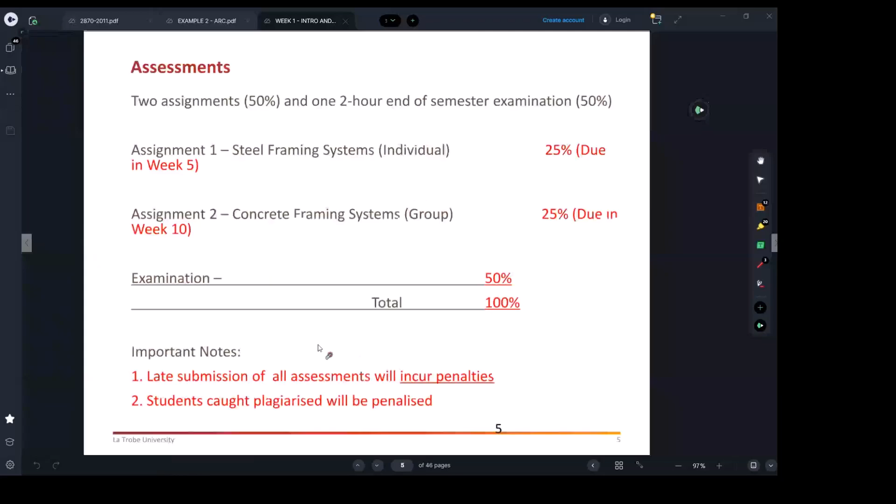You can see our lecture notes can be really lengthy, right? Some of them have large pictures, but the way I'm delivering them to you, it's kind of industrial. I'll talk with you as we want to build a project together, not just reading what I see here. You're gonna see, and I put them there. Someone will ask why we have all those materials.

They will help you give me the right answer for assessment 1 and assessment 2. That's the answer. All the information is given to you in the lecture notes. They're gonna be the key elements you need to know to get ready to first answer your assignment 1 and 2 with your teammates. Number 2, to get ready for the final exam. Final exam will come only from the lecture notes as well as the practiced assignments and workshop questions.

So I strongly suggest you attend, or ask, or watch if you couldn't, the videos, because things I found in the past were really very useful, and students get well engaged with it. So 2 hours, which we started the first one today. As I said, next week we may have our lecture from early in the morning. Workshops.

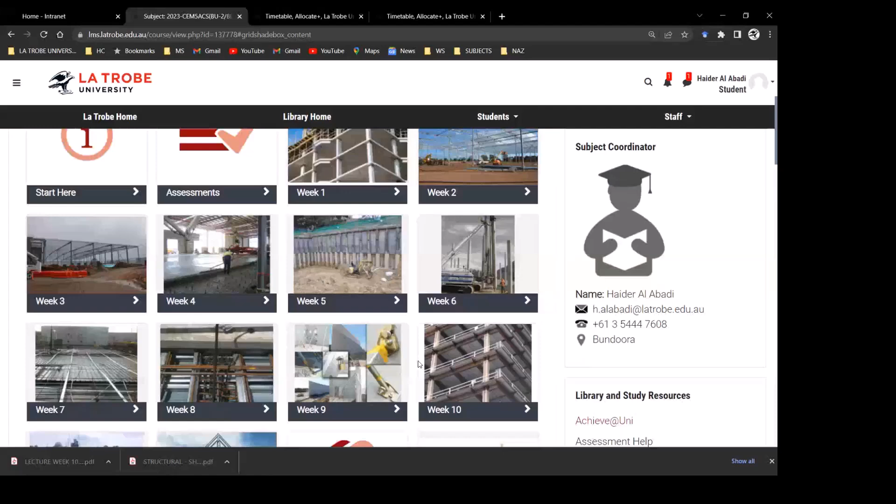I'll confirm this as I go over the weeks. Let me give you an example - when I give you assignment 1, I will simply ask you, for example, where I'm going to teach you all the details, how we connect the portal frame elements together.

I will teach you, let me zoom in - so I will teach you all about the challenges and details to build a portal frame steel structure like this. There is a hinge, there is a column, there is a rafter, there is purlins, there's girts. I know these are the terminologies we're going to use and use and use.

So in assignment 1, I will ask the students to detail or annotate for me the connection between this and that. Some students just Google search something from somewhere and put it on their sheet and tell me this is the answer - it's absolutely wrong, because maybe they did not even attend my lectures or the workshops, so they don't know what we're talking about.

In my assignment, I've given you all the real pictures, and you're supposed to be searching for the correct picture, then annotate things and detail it in the right way. It needs to be related to the project. You don't need to Google search and just find for me a portal frame connection. They end up doing that, and I can show you such examples, which is really funny.

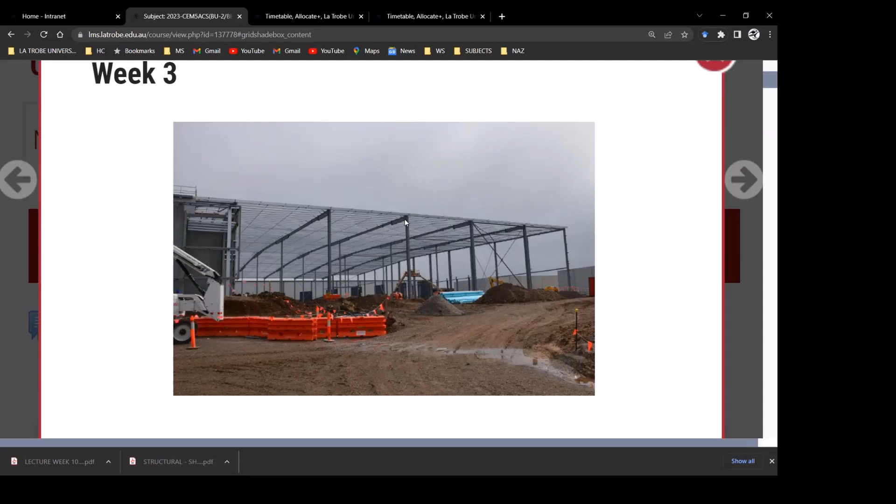But this is just an example. The drawings I'm going to give you are about 4 to 5 projects. You're going to be using a lot of knowledge, details, and construction skills. You will be asked within those projects, full stop.

I will not go find another challenge and ask you about it. The ones we practiced and talked about in the lecture and workshops, they will be the ones that come to you in the final exam. There may be some details I kept on those drawings, like connection details we don't talk about. I will not bring those, I know that.

Everything is recorded, and I know what I taught you and what I didn't teach you. So if you're following with me, you will. I see students really get on top of the subject very well.

Unfortunately, very few people fail the subject because they simply just don't know what we're doing, and they're busy. They're just not really following the curriculum, which was a weakness.

We try to support the students. I know they may be engaged with something else. We try to support students as much as possible, but you can't. Some students really don't answer anything or talk about what we're discussing. Sometimes in the assignments, they go and get things from the internet.

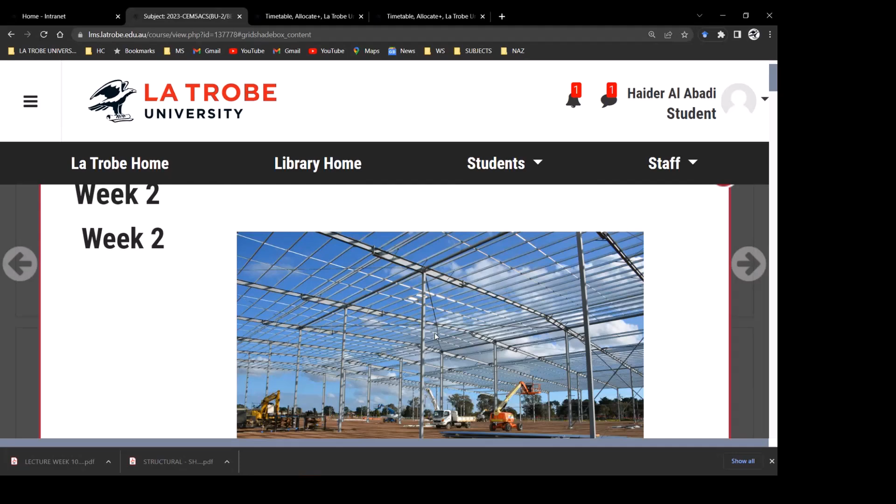This one is a bracing element. See this X here? It's a bracing element, right? So I may ask you to detail the connection between the braces. So that's really the construction techniques, and students typically do very well.

So no open book. Any software need to be learned to do these assignments? Not really, no, no. You don't need software to learn this subject, but you need to know how to type things and get things done.

Any other questions? Recommended a book for this subject.

You're going to be provided with all the materials you need. The books that I may have, I will list for you. Actually, there is no book because the books may not be local.

What I'm interested in for this subject is exposing you to local materials, as well as a lot of industrial materials. For example,

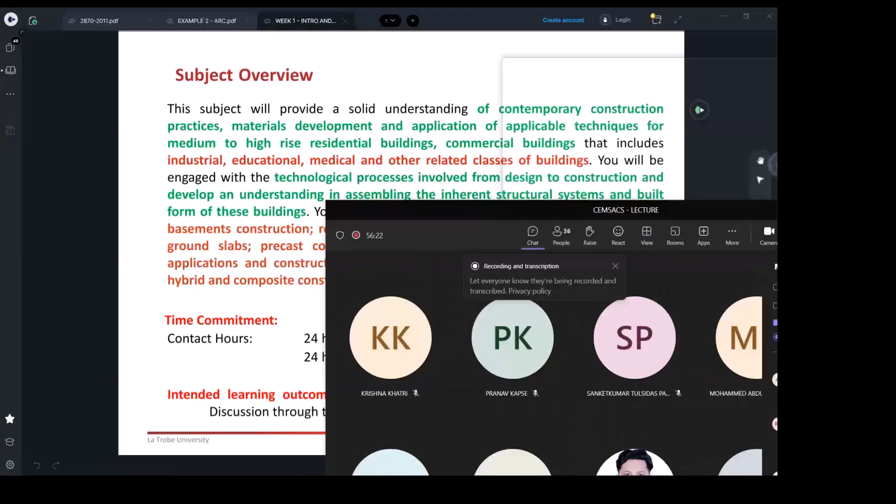I will show you. If you bring up Microsoft Teams, actually not this one, there is another page in Microsoft Teams. Let me open it. I think Bendigo students already received something about this. What I'm trying to say here in Teams...

This was actually your icon, Advanced Construction System. That's where you are now in this lecture. This icon here is for the online workshop for Bendigo students. Only Bendigo students are able to access this. The recording will be saved and they can access it whenever they want. However, Melbourne students, when they are expected to come to campus, won't have access to this.

Workshops are really dynamic and active because during the workshops I will be spending 50% of the time giving you support to work on your assignment. Basically, I will be solving the questions for you. Over the workshops I will start solving your assignment one. This coming workshop I will introduce you to your first activity and assignment, and start solving the questions. I like showing you how to do it. So that's where I'm expecting you guys, in a group, to come up with high quality submissions.

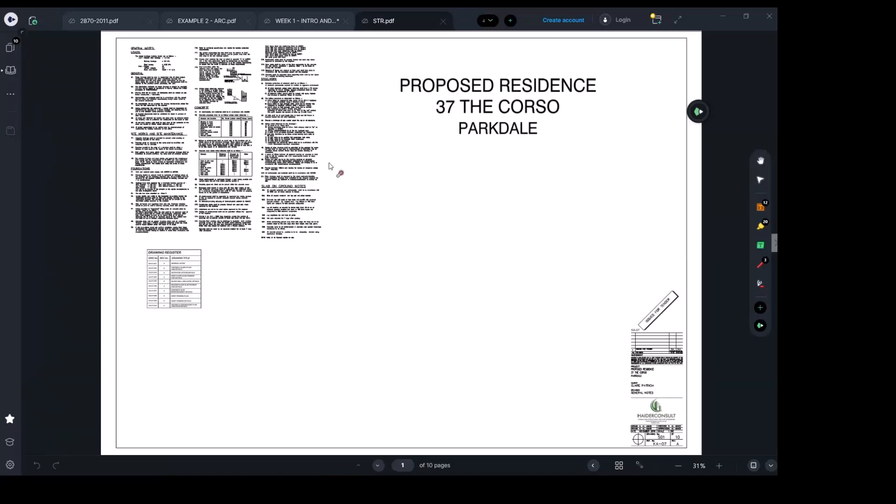I'm not sure if this is the one, but let me try. Because I don't want to show you your drawings. So this is just, I was showing the students structural documents like this.

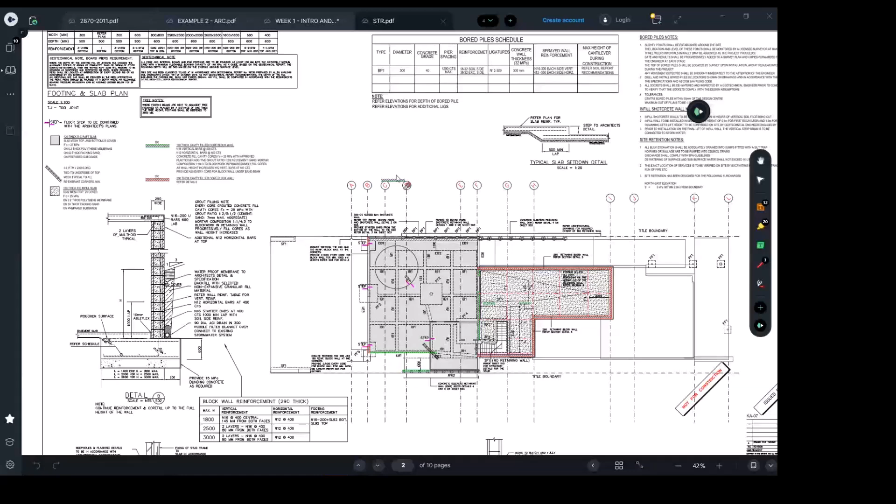I was telling the students that architectural drawings usually can be understood by different people from the community, because usually the architect is doing them for general, public use. Everyone, a lawyer or whoever in the industry who wants to build a house, should talk with the architects to know how to do them. But engineering drawings, no, you've got only professional people who know how to use them.

Some clients, they may ask. So what I'm saying is I'm gonna be exposing you to, like this is a residential slab we're talking about, but your projects are a bit more complicated than this. You're gonna be exposed to many engineering drawings or even architectural drawings.

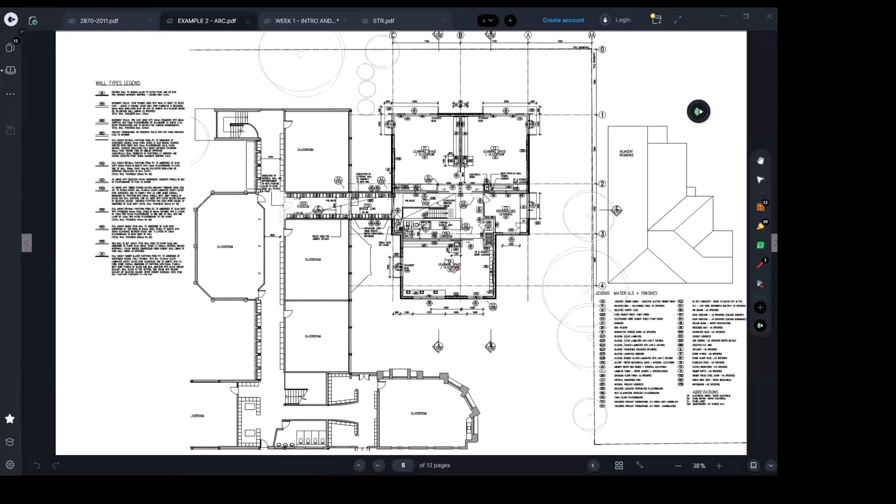These are architectural drawings for one of the main projects you're gonna be doing. What I'm saying is normal people can understand architectural drawings with some thought, but structural drawings... I closed it and I just need time to find it. I don't know where it is for this project.

Which subject was I talking about? Yeah, this one. Is there anyone among you who was practicing as an engineer or worked on it? Are you all engineering students or?

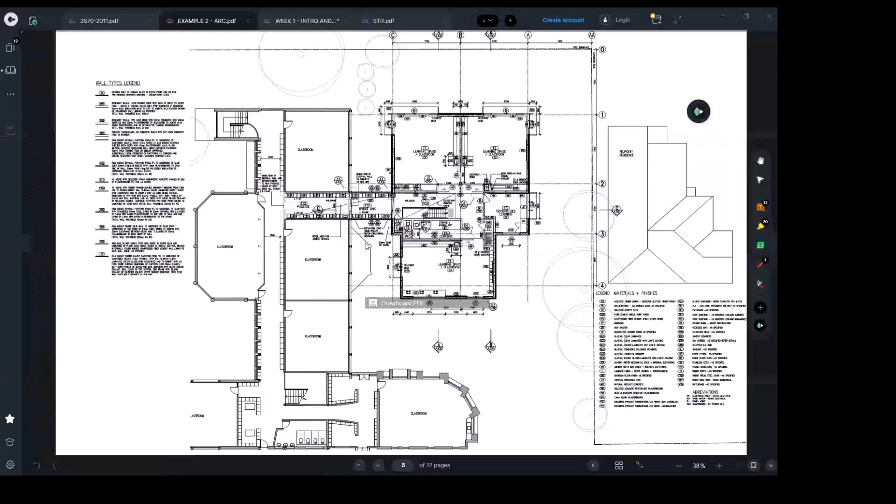Here we go. So as I said, these are the architectural drawings for a school development, which is going to be one of your projects. You're going to be practicing on and understanding buildability and feasibility challenges. As I said, the architectural drawings are mostly to do with the look, etc. But structural drawings for the same project look something like this.

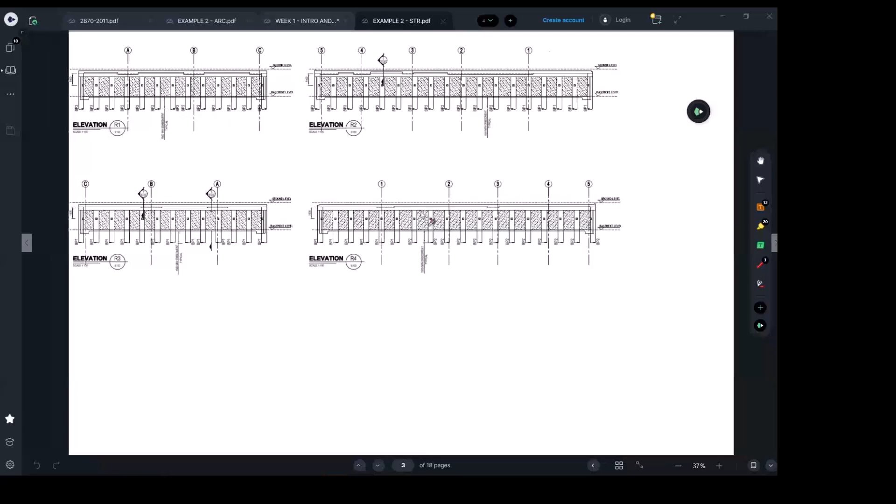So can someone tell me what this is about? What does this show you here? Don't tell me elevation. I know elevation is written here, but elevation for what? These are the columns from the side. Thank you for trying. Any other answers?

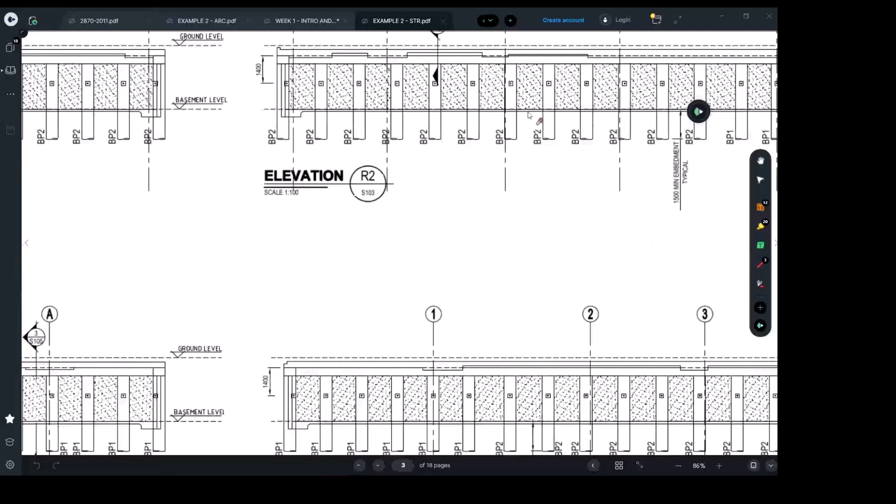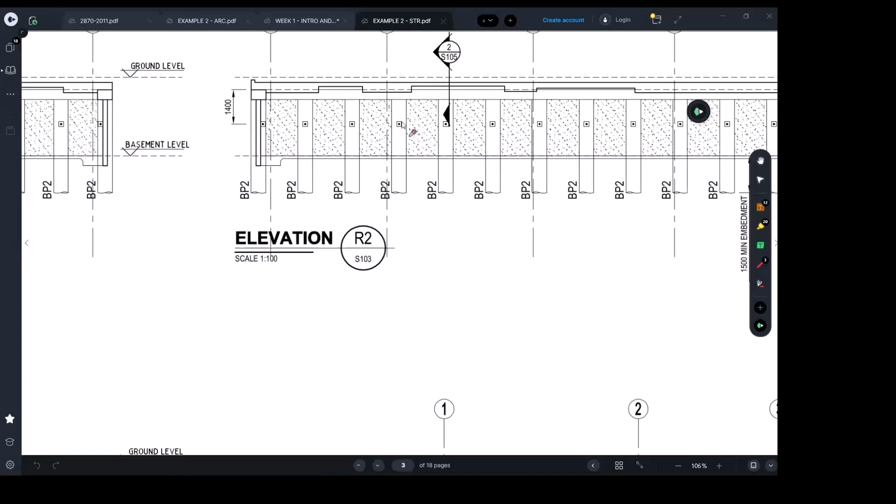Thank you for trying. Slabs. Any other answers? There's the drawing of a truss, roof truss. Thank you for trying. Any other answers? They are piling. Perfect, well done. It is, they are piles. Yeah, they are piles, that's it. They're telling us how piles are built, and they are anchored piles.

So that's what I'm saying, I was stopping at this slide. Drawings are the key elements to work with in order to do your job and get paid. You are in the construction industry, whether you're going to be a manager or a big boss or whoever, you have to debate with your client or the engineer who did it about the drawings. That's your language, so you need to understand it. And this subject will let you have very good experience in doing that.

So please, these are hands-on assignments. Hopefully this time I won't see a literature review about concrete. You'll be giving me, yeah, it's not a report, it's engineering documents I want you to work with. Yeah, there are piles. A set of images, like assignment 1, I will give you a lot of pictures taken for a project and ask you to annotate and detail the names.

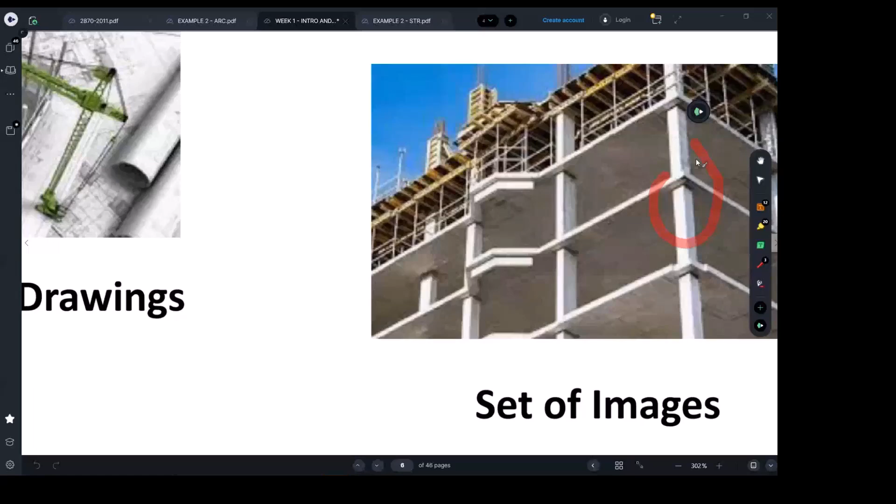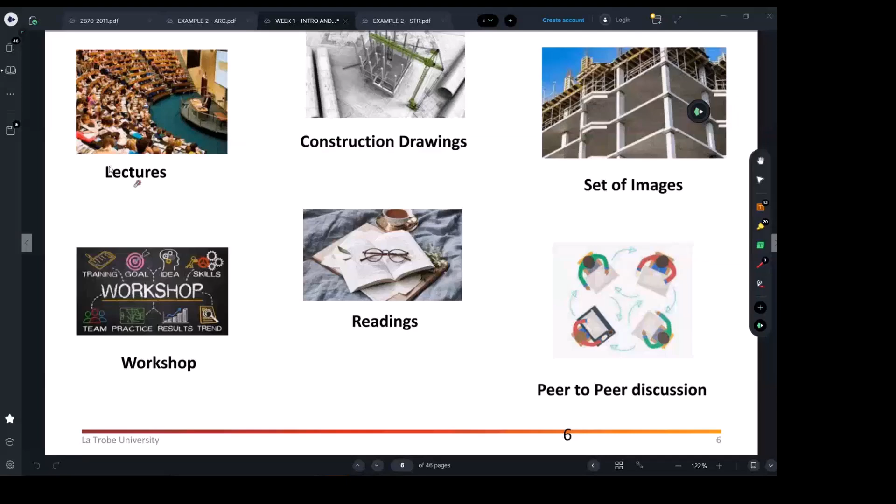As a practicing construction engineer, you need to know the terminologies, the names of the connections. Sometimes I'll ask you what type of actions we have there, some engineering thoughts you need to put there. So we're going to be working on images, drawings, lectures that I'm delivering with you every week. You have to understand them, the lecture notes, workshops. They are the environments which will facilitate the delivery of these ones.

And the good thing which I found really gets students super engaged is that I will help you solve those assignments, okay.

Reading materials, as I said, to some limit and as per my instructions. There are reading materials that I'm giving you in a particular week, which I just want you to know about their existence. But don't expect me to ask you about them in the final exam. No, no, no. If I have used one of those reading materials in solving questions and figuring out a construction process, then yes, expect it to come in the final exam.

If this is clear, I think people should not ask me this again, because people do ask how they can get prepared for the final exam. It's 50%, and I'm just telling you this now.

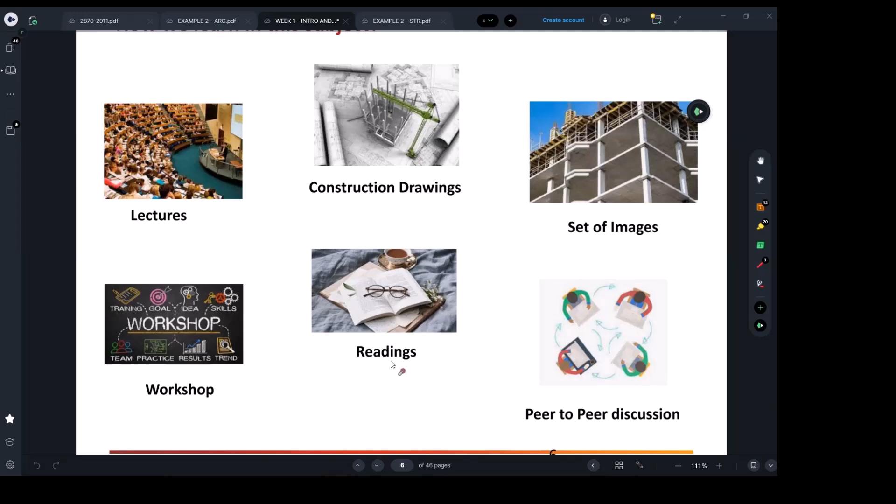And this is your team, maybe 4 or 5 people, will figure this out. Yeah, you need to have that peer discussion.

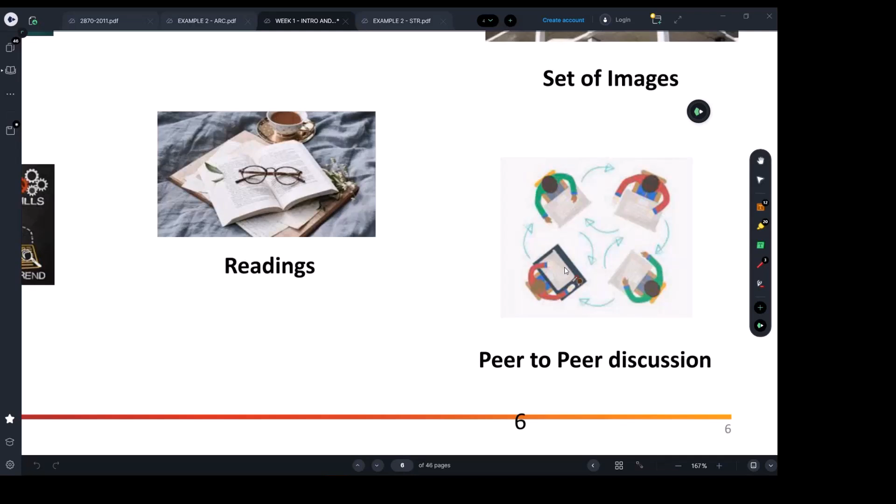If you're going to submit your work, I will be asking students to put at the top who did which part. Maybe give me a summary page or table saying Mr. X did these sections, Miss Y did these sections. I need to know those names to make sure there was teamwork. If I find one of the qualities is really poor, that means the others won't be impacted.

Okay, any questions?

Okay, let me give you a 5 minute break. You need 5 or 10 minutes break? Yeah, no preference. So let's meet again at 10 past 5. Just have a quick break. Yeah, you want more? Okay, let's meet quarter past 5, then I will continue over the slides.

I know I've slowly gone through the first sheets because I just want you to understand how we're going to be working together, because if you misunderstood the main learning techniques, that's the challenge. All right, so let's meet at 5:15 and then continue the slides and take it from there. See you then.

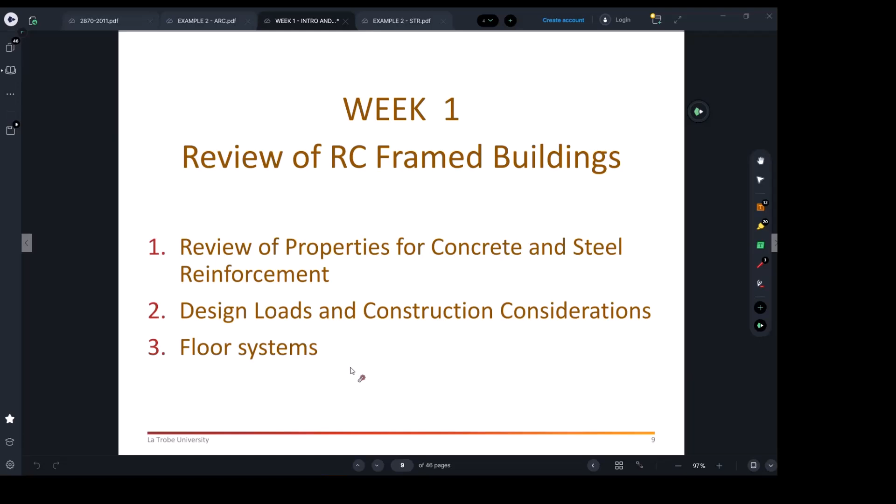I won't go through design, just talk about the construction side. So there are a number of properties for concrete and steel which a construction engineer needs to know about when supervising the construction of such elements. For example, here we're starting with...

As I said before and saying now, we assume students have enough background about concrete mix design and these kinds of details. This is just a reminder.

Now, RC refers to reinforced concrete. I keep saying RC, meaning reinforced concrete elements. They have two types of properties: fresh concrete or wet concrete, which is the one we just poured, and hardened concrete. In the morning, I was teaching design students how we design concrete, and I was telling them the hardened properties are the most important ones for them, because typically engineers design the status of hard concrete, as you studied at undergraduate level.

However, for construction engineers, fresh concrete is also important, maybe even more important than hardened, because if they build it correctly, hardened concrete isn't their problem anymore - it's whatever the structural engineer did. But fresh concrete is what you're actually getting supplied with and what's going to happen on site. So you need to make sure it's as per the recommendations required from standards or drawings. So wet or fresh concrete properties are things like workability, slump test, bleeding, shrinkage, plastic shrinkage, and compaction and curing.

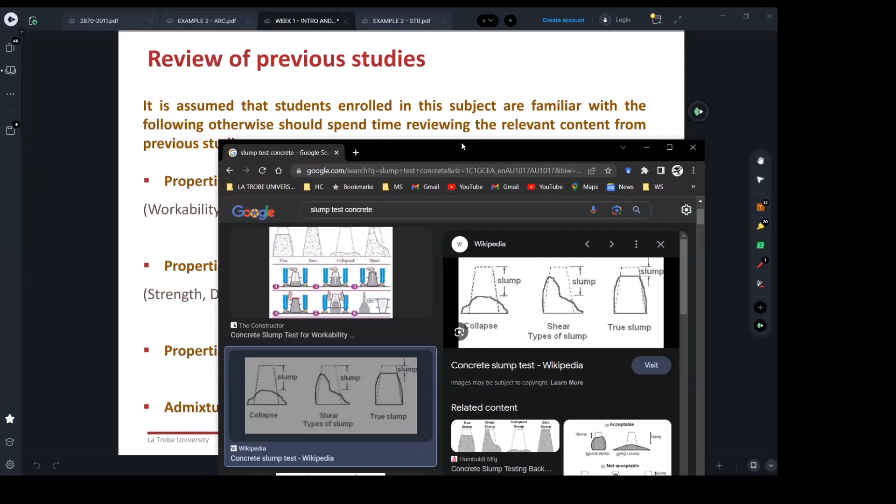So when we're talking about slump test, they're going to be doing these tests in front of you, or you make sure you have some certificates. These are the slump tests I was talking about, which one of you briefed me about already. It's like an inverted cone like this, and they're going to be filling it. They do this on site when pouring the concrete - take some samples, put them inside the cone, then lift it straight up, and see how the concrete slumps.

Now, what guides you on whether it needs to be a large slump or a small slump is up to who? Structural drawings. If I'm still opening these drawings - I'm not sure if it's open. Where are the structural drawings? Why do I have this?

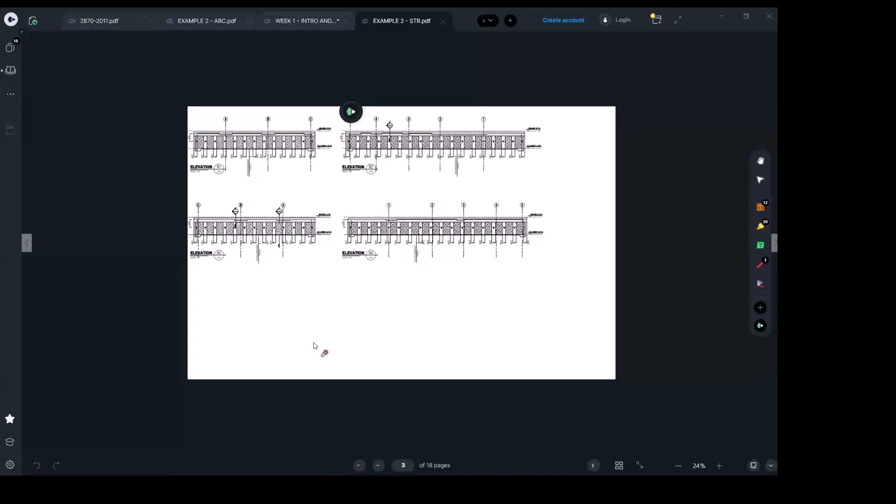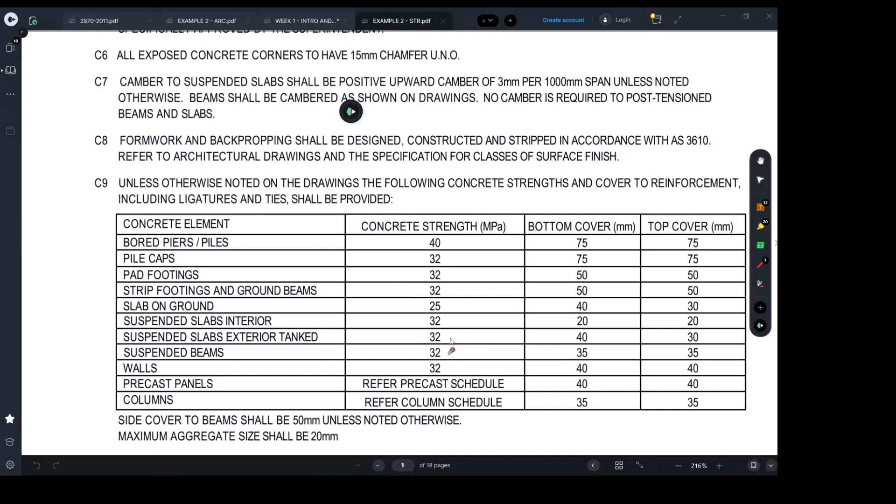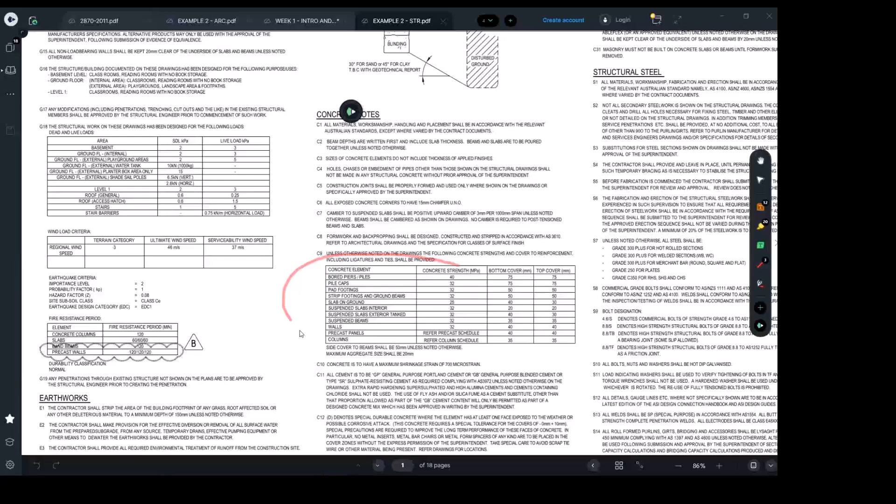So the front sheet typically will tell you what slump test you need for a particular type of structure. I think it's here - no, it's not here as well. Depends on the project. So this is the concrete strength, right, which is a hard property - I'll tell you about it as well, how to check for that. But slump should be there too, maybe it's written within the texts. Sometimes we'd have a table like that. But anyway, regardless, this is just loadings, which is fine, but maybe it's written somewhere inside the lines here, which we don't need to worry about. So basically it should be written on the front page here, and that will confirm - let me go back to my notes - it will confirm the workability.

You need to make sure you have adequate workability in case you have a lot of bars in your slab and the spacing is too small. In case you had a very low slump, it will be difficult for the concrete to go through those voids and small spacings, and then you will end up with gaps. Even the vibration system you use may not really help. So these kinds of things you need to be on top of.

Bleeding means the escape of water from the mix. This is again a site observation construction engineers need to be aware about. You need to make sure when the concrete is poured, the bleeding of water is not excessively happening on site, because that may impact the quality of concrete. You don't need the water to go out from the mix very fast or too quick - you actually want to keep the water.

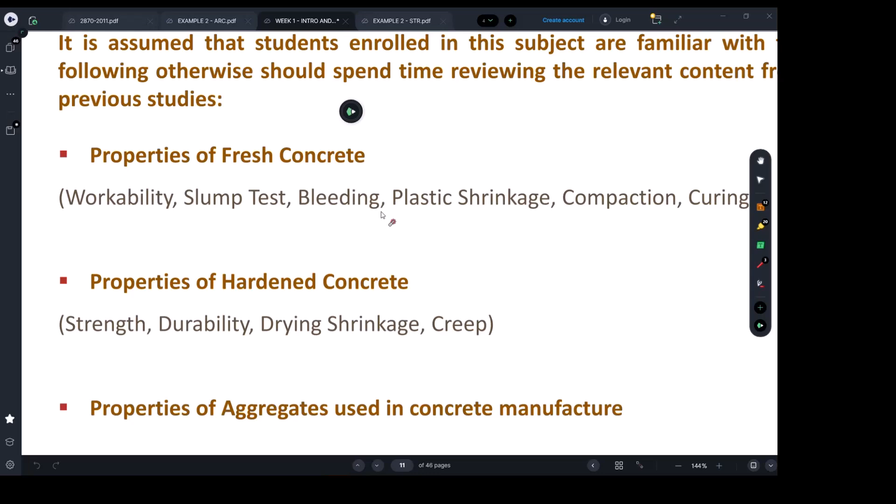You want to impose the curing process to make sure the chemical activity is happening slowly. Because if the water is not there, then not all your concrete has actually been chemically processed, and you may have very soft spots in your concrete, in your final concrete product, which is a weakness.

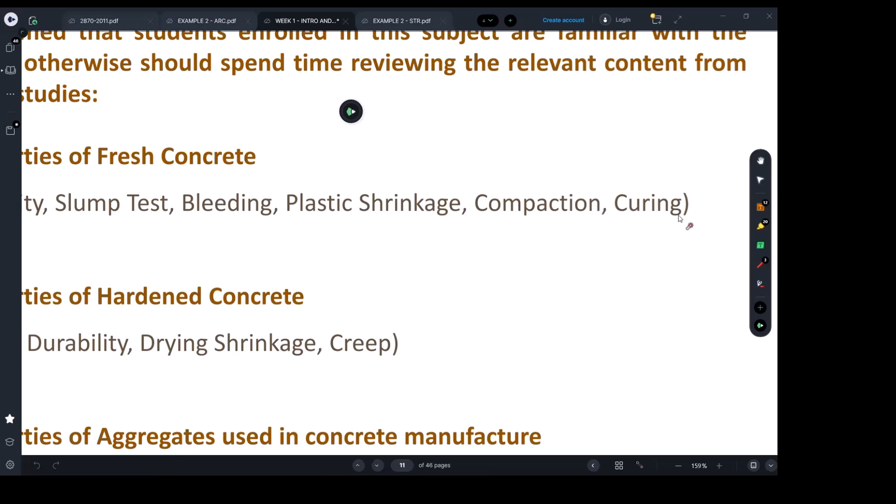You can't really rush it, you have to make sure it's not too fast and not too slow. Who's going to tell you about these guidelines? Either the structural drawings or the standards. The standards will give us all these kind of properties, and they're not independent, they are interlinked.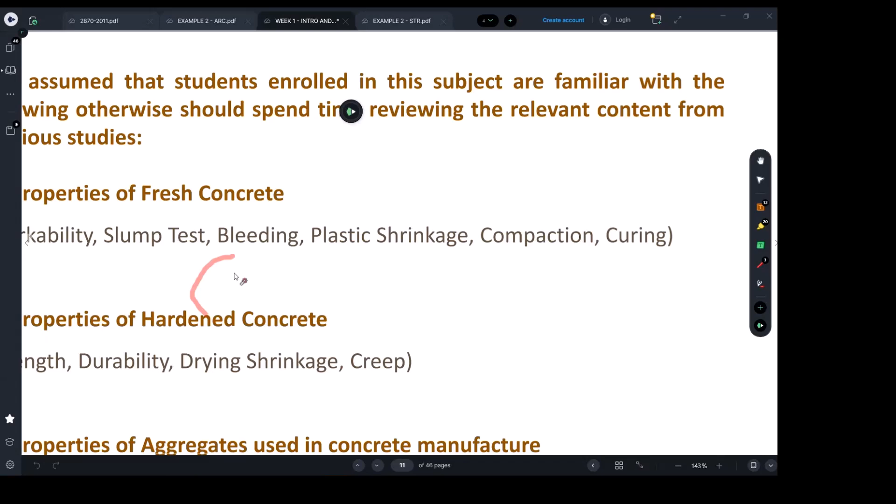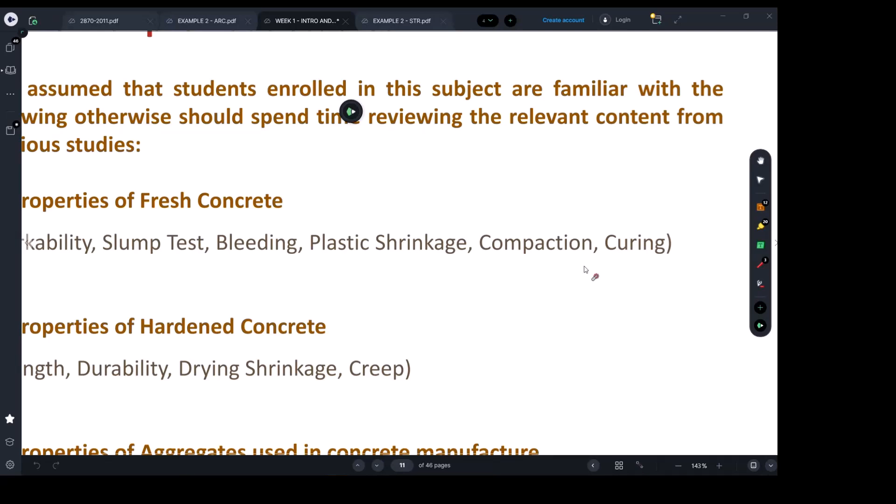For example, slump tests will help you control workability. Curing will help you control bleeding, shrinkage, plastic, compaction, and there are other ones like vibration, which is very important to make sure your concrete mix is right. These properties are dealt with during construction, which is why they're important for construction engineers, as well as hardened properties.

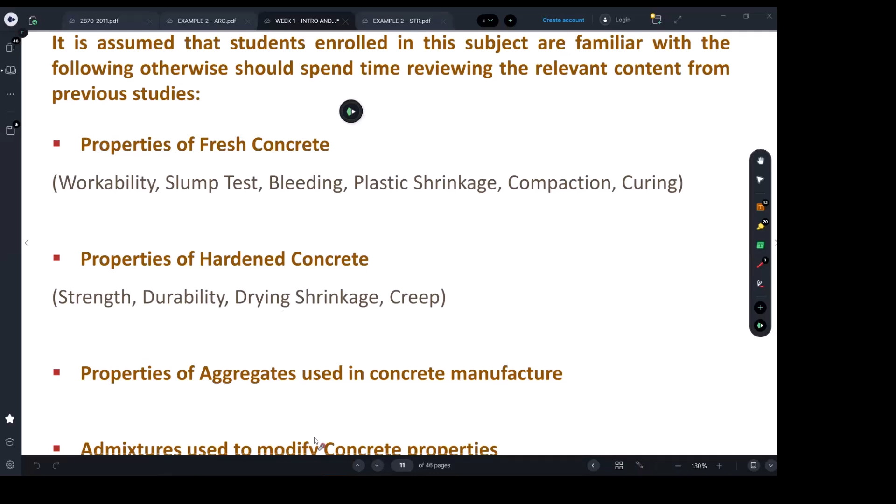You are the builder. You may be in a case where, if things go wrong, you need to prove that this strength of concrete was used. So the hardened properties are strength, durability, drying, shrinkage, creep. You need to make sure the strength was correctly built. Now, how are you going to prove this?

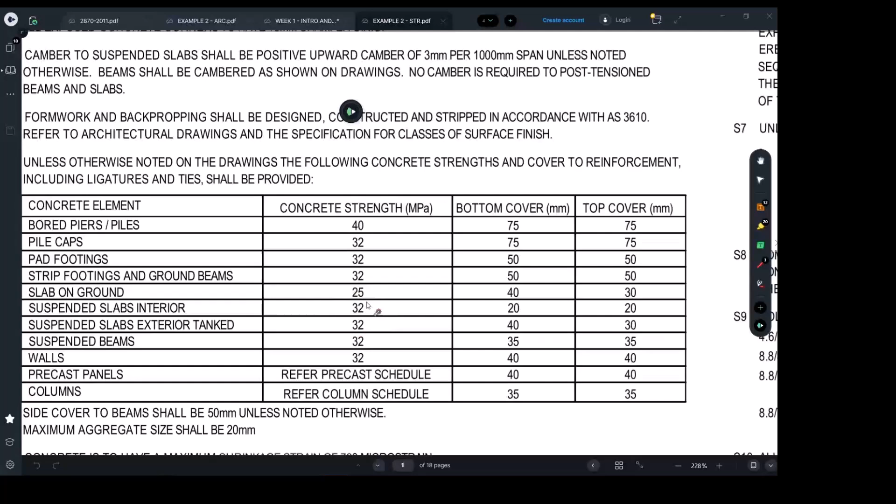The structural drawings, which I was showing you, want for the slabs 32 MPa. So how are you going to prove this was the case? When the supplier comes to pour the concrete, you need to supervise and make sure they take samples from it in cylinders. They're going to break the cylinders after 28 days and report to you the outcomes, because as per the standards, after 28 days, the concrete should give you more than 32 MPa or equal.

So you have it as a proof. You're going to put it with your paperwork and make sure it's all done correctly. Okay, properties of aggregates used in the concrete.

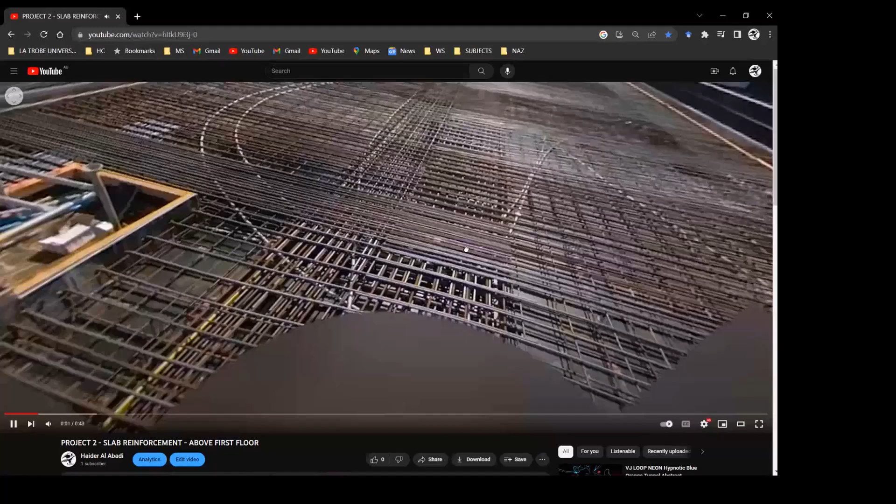If you had a slab which has a lot of reinforcement, we need to make sure the slab is actually done correctly. I will just show you an example for slab. This is a concrete slab that I've recorded before with a 3D camera. You can see some slabs going to be heavily reinforced.

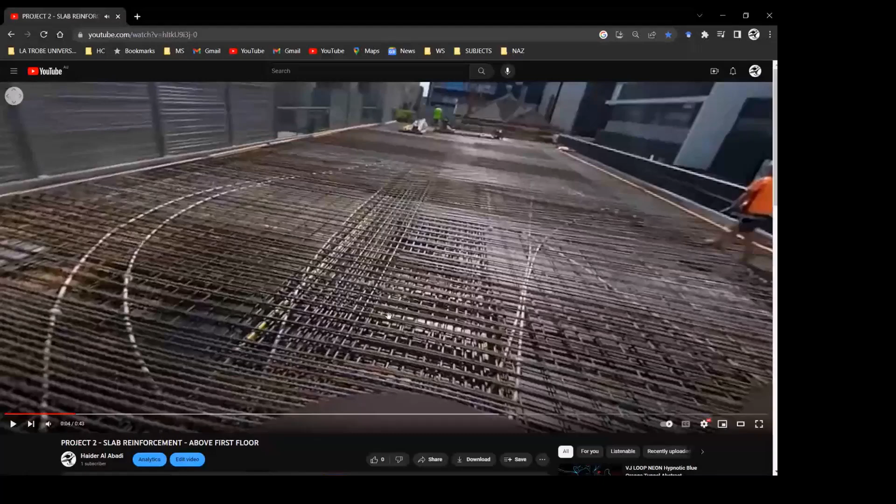We had a band beam here, and these are the slabs. You can see within the band beam, the spacing is very, very small. The spacing of the bars goes really small, so you need to make sure when you order your aggregates, they should be smaller than the spacing to make sure the concrete will go through. You don't need an aggregate stuck between these bars, because then you're going to cause a problem there, definitely going to have a void at the bars. So it is a failure.

That's to do with slabs. Jumping back to my slides, what else? Admixtures - can someone tell us why do you think we add admixtures?

To bond it quickly, for concrete bonding, and to settle down the concrete more quickly. Excellent, that's totally right. Sometimes, yes, there are different products of admixtures you would need to specify and request.

For example, if you're pouring a concrete slab for an outdoor area, then you need to be careful in having a watertight concrete mix. To make sure you have the best quality, you can use admixtures that can reduce the crack size to a minimum or eliminate them as much as possible, and that will help you have a waterproof concrete, like what they use in swimming pools.

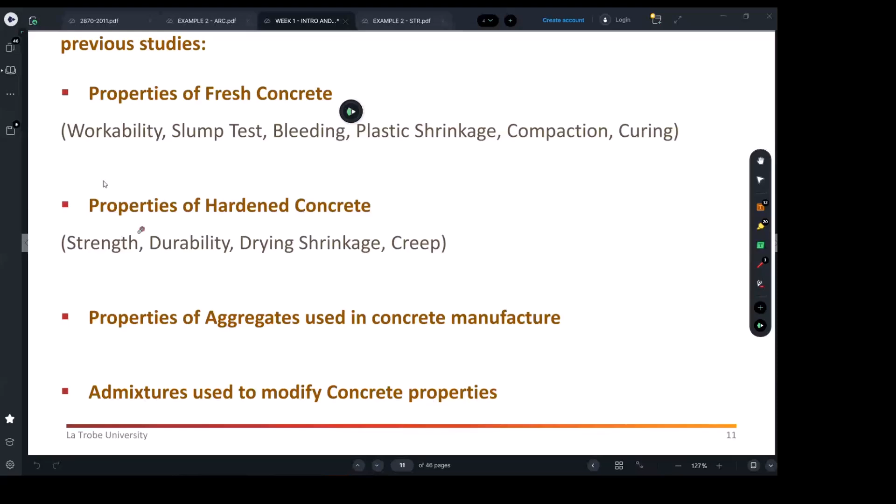Controlling a bit more the curing process, you can do this with chemicals. Yes, you can control the curing process. Curing can happen with wet sheets - sometimes you want to cure the slab, you can have wet sheets to delay the water evaporation, like what was mentioned before. And the same thing, you can control this with some admixtures. So these are the properties which you definitely would need to know about.

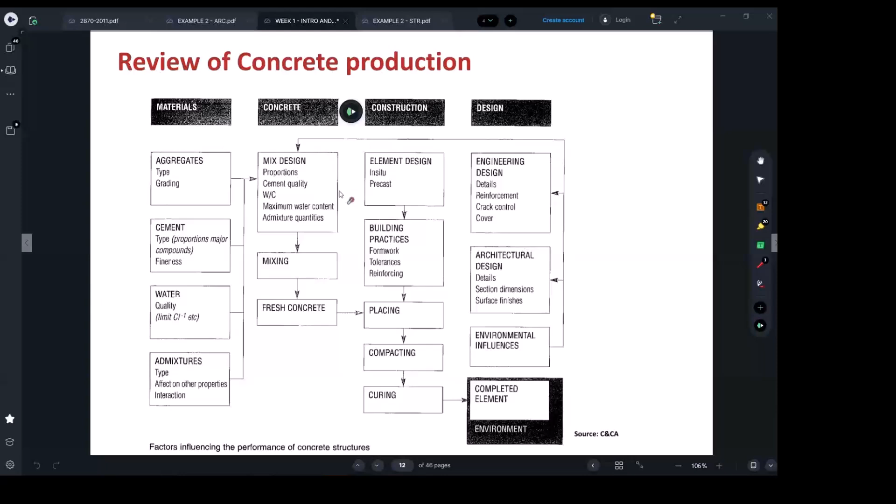Concrete production, that's again just a flow chart. Things like this, I will be very clear - I won't be asking you in the final exam, can you plot for me the process of producing concrete? I won't be asking you this. But in summary, this is just showing you how we start with the materials and we end up having a mix design by the concrete suppliers, then we end up with the fresh concrete and we can get into placing it on site.

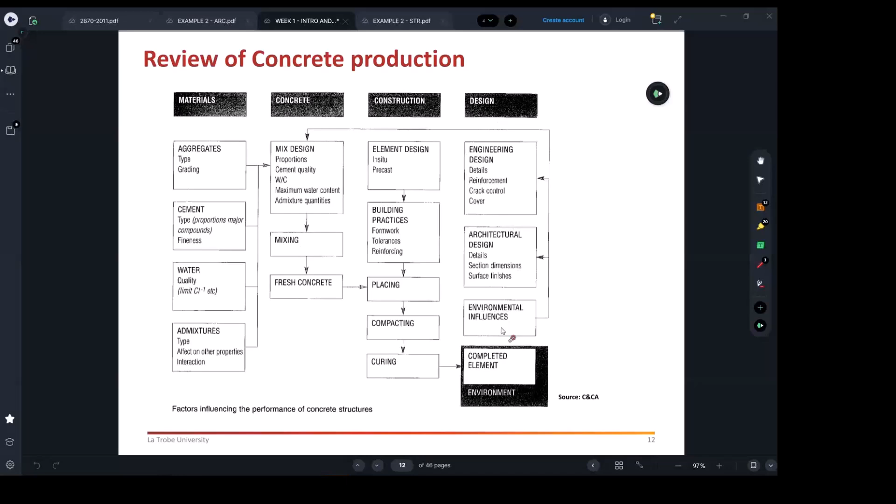All right, so the main references for concrete are the local standards which engineers use. Chemical admixtures, if you need to know what's locally implemented - yeah, there are local standards. And I will be exposing you to a number of their documents. There is an institution named CCAA, which is Cement, Concrete, and Aggregate Australia.

It really gives very interesting, simplified practices for professionals working in the construction industry - not only builders, but also engineers, architects, all of those use them actually. And like, for example, when I'm going to teach you about industrial slabs, I will share with you some documents from those people about how to decide on placing the control joints. Control joints - they are the joints we put between slabs to make sure they're going to work properly.

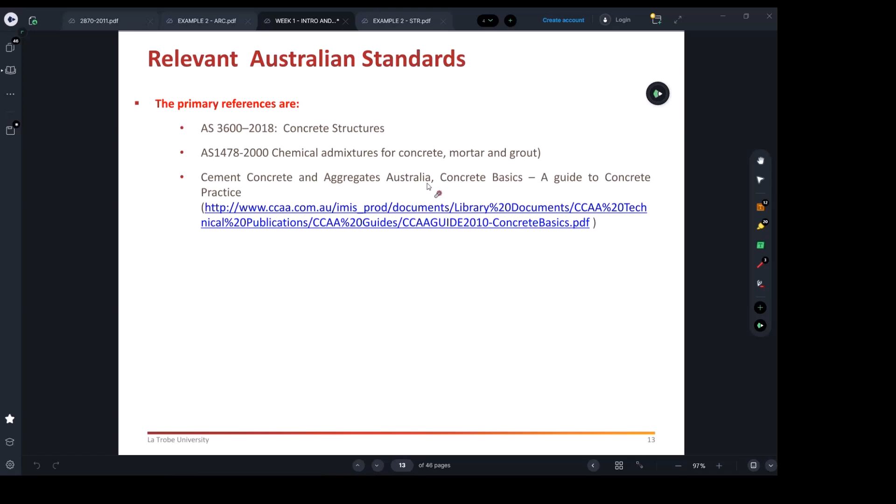Okay, there is also other practices talking about precast panels, I will share that with you. So one of my personal links that engineers use a lot is this one, CCAA, which has the other documents I was talking about. Okay, driveways, I think they also have good ones - I think I mentioned the control joints and crack control. They all have them. They're very, very handy. They kind of simplify things so people can practice things effectively.

There are some references here about steel. Now here we're talking about the steel which we place inside the concrete, and they come in different types, right? We have the straight bars, mesh - mesh, they are kind of bars which are pre-welded in the factory. So instead of placing the bar one by one in both directions, sometimes you are able to buy mesh and just put the mesh, like a 3 by 3 meter mesh. It kind of saves time in doing this. Those bars sometimes need to be hooked, cogged, or spliced - yeah, again, all this is coming from the structural drawings. Do we know what spliced means? Or cogged or hooked?

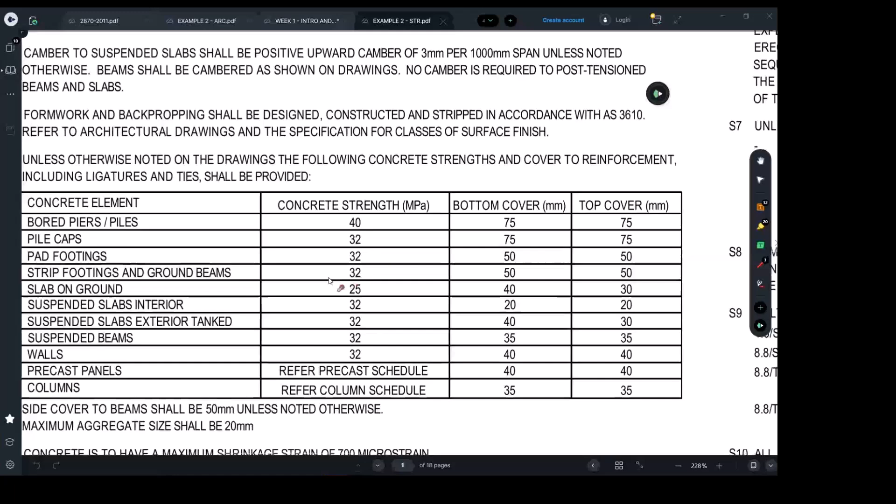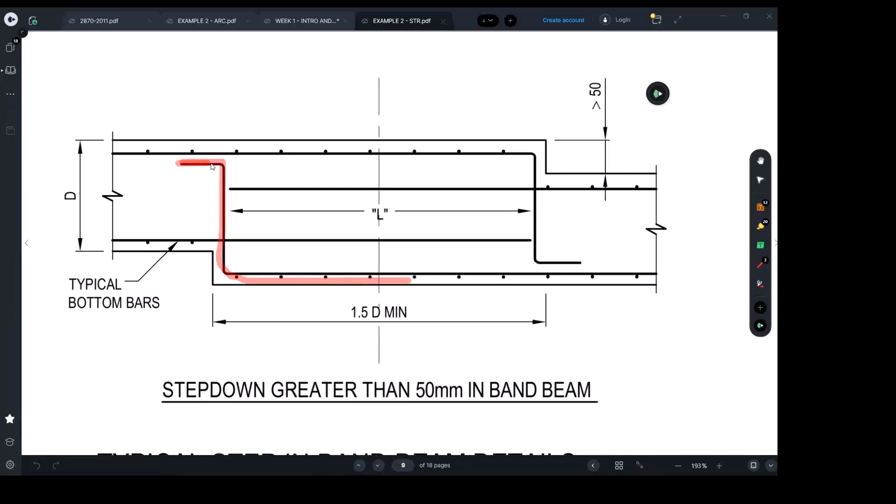This means cog. So when you need to specify this bar, you need to make sure it's going to be cogged as shown. That means it's cogged or hooked. That's why it needs to be the same thing here. We have Z bars, same thing here.

Some people are answering me.

That's right. And at the corner or at the end of the slab, like this one here, like a step.

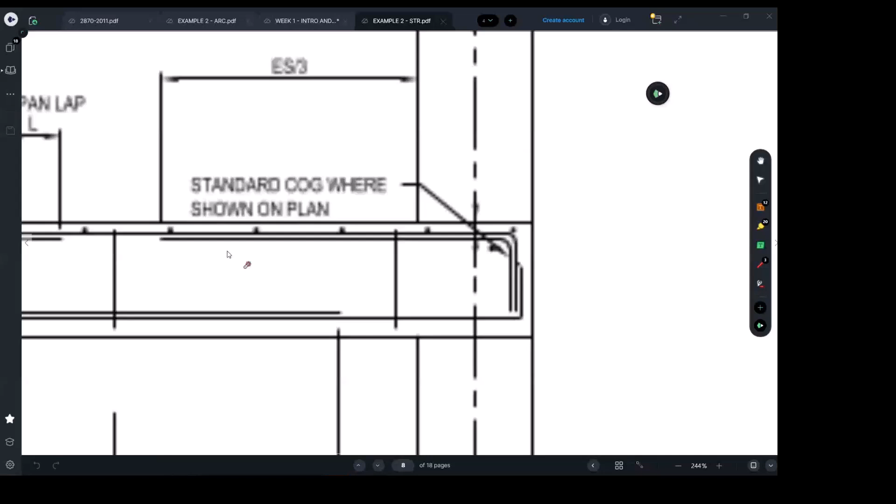Yeah, so I think that's what we mean with cogged. I think this one here shows you in general. Have a look here. See the top bars here, we cog it at the end. That means cogged. If hooked, we don't use them a lot. They are like this. We use them with the stirrups. Hook - this is called hook.

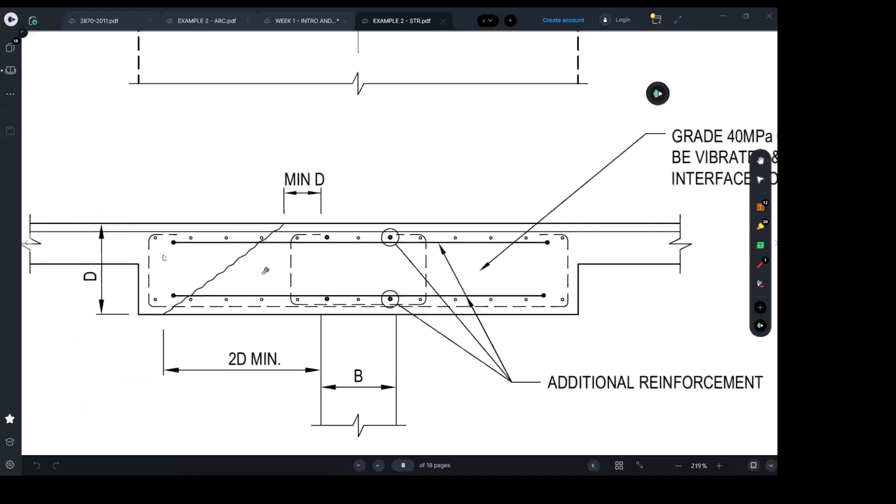And where is it? I think we have stirrups here. Here we go, yeah. This is still cogged sometimes, but hooked is more expensive. It's like this. If we do it like this, what's the difference? No major difference. Okay, so the thing is this will be a bit longer because you have to go with 12 times the diameter. So this is really to do with design, which I don't want you to bother about. I just want you to know the terminologies, that's all.

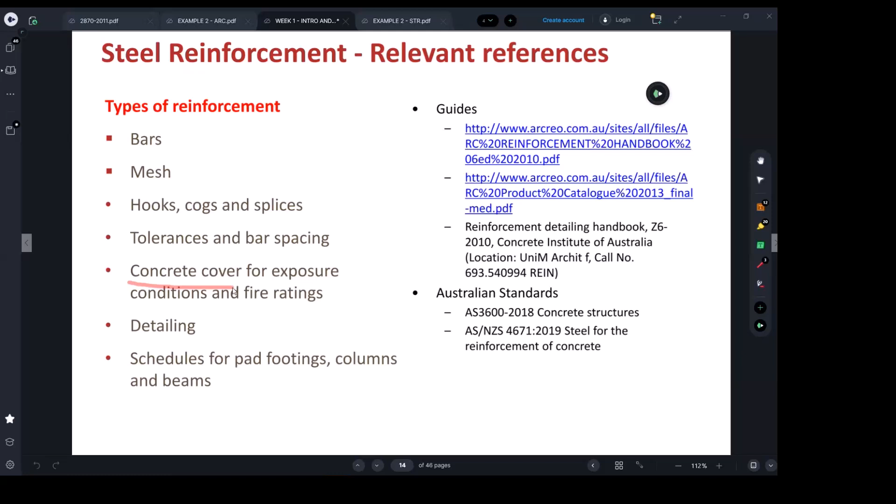Okay, back to our notes. Tolerances and bar spacing - there are always acceptable limits that you can go above or below when you place these things. Concrete cover, very important property to handle well. Concrete cover means it is the spacing between - I think I can look at here. The concrete cover is the distance between the outside of the concrete and the side of the first bar, whether top, side, or bottom bar. This is the cover, from here to there. That's what we mean with cover.

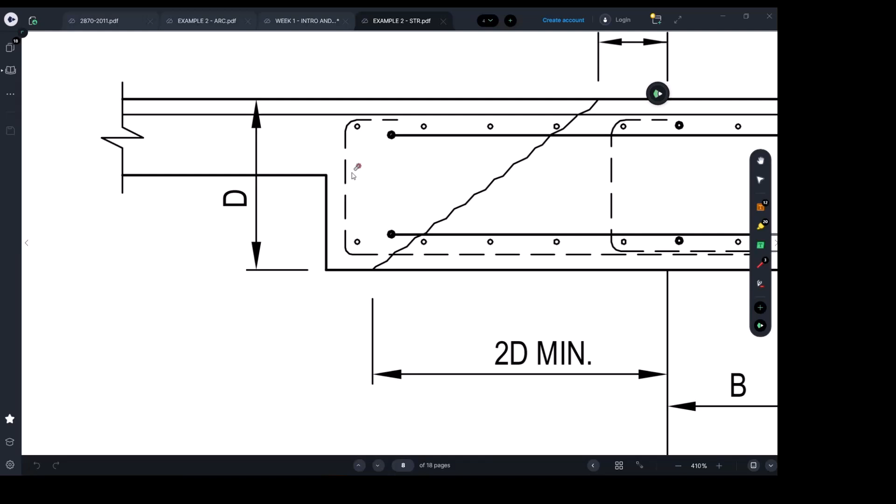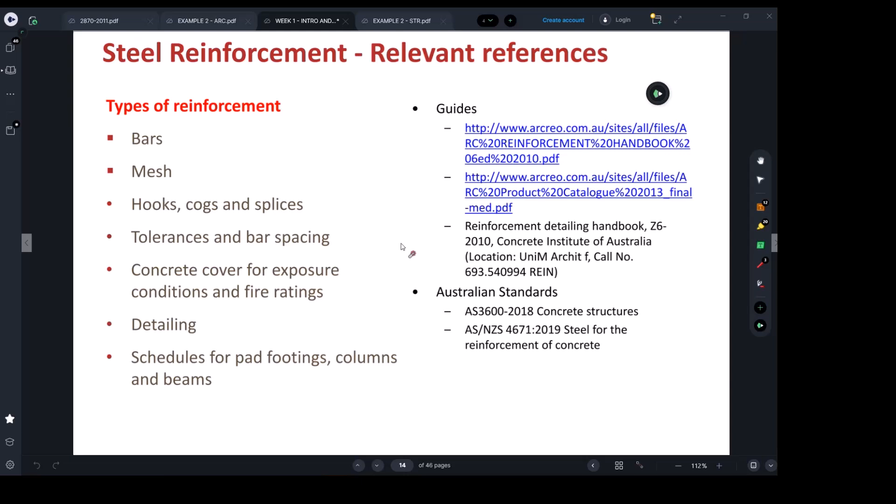And over the weeks I will show you how this is actually looked after and done in the projects. We have chairs, all right. Remember here we're just exposing you to this, it's an introduction. No, it's concrete cover, it's not clear cover. When we say concrete cover, it is the distance between the outside of the concrete and the steel, the side of the steel.

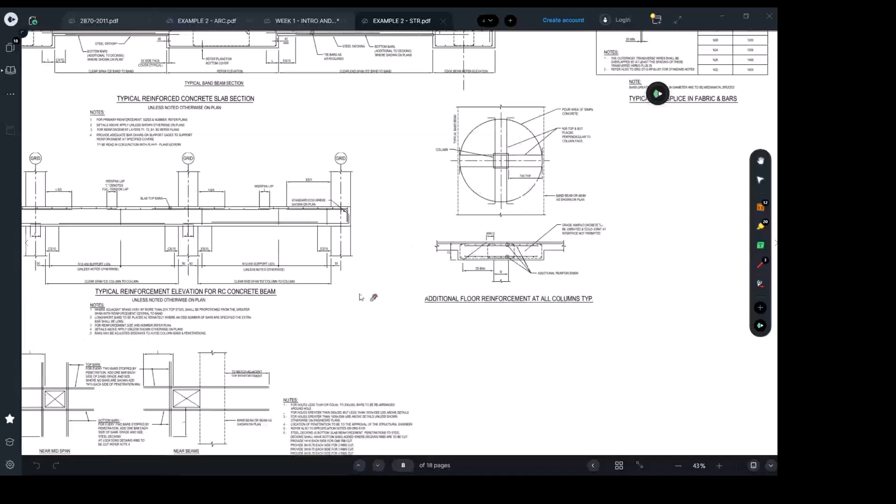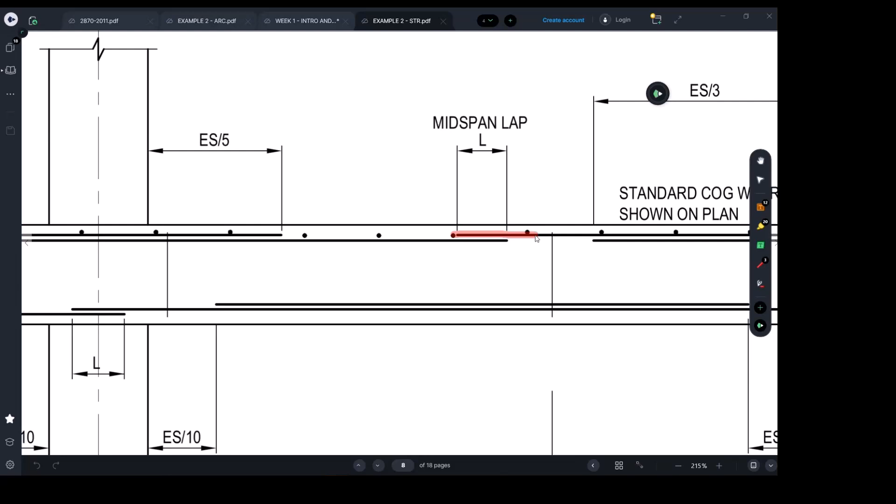All right, these references talk about detailing. Detailing is the details I showed you, like how you cog things, how you lap things. Lapping, again, I can show you a quick example. Sometimes, typically, your steel bars cannot be longer than 12 meters because that's how long the trucks are to transport it. So sometimes if you have very long slabs, you have to lap them together. And when you lap bars together, they have to be within what the standards allow you to do, like 50 times the diameter.

So they are just features, given to you on the documents, whether drawings or standards. As a construction engineer, you need to know what to do. I'm not asking you to tell me, I want to make sure you know how to read them, okay? I want to make sure you know what they mean. But you're not supposed to know it is 50 times the diameter - that's what the engineer is going to tell you. The engineers usually will say that, here we go, it's here.

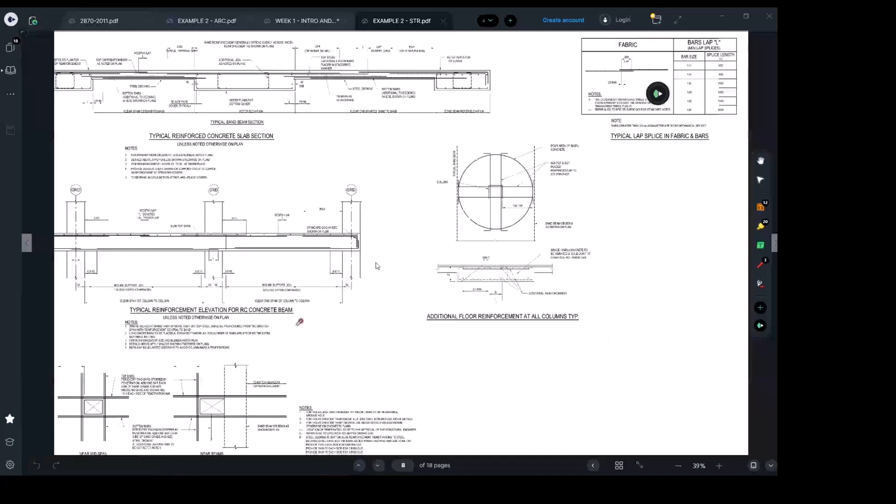See lap? And that's where lap L is. So if it's N12 that bar, it's given to you. 16 is given to you. But you need to know what does it mean. That's what I mean with lapping the bars.

Yeah, schedules. Schedules means, after you receive your structural drawings, you won't be taking them and straight away go and dig and build. You have to have a steel scheduler who usually works for the steel supplier. They will be making shop drawings. He will be saying in detail how many bars are required, how many of them need to be cogged, how long they are, how many laps are required. So it is a bar bending schedule.

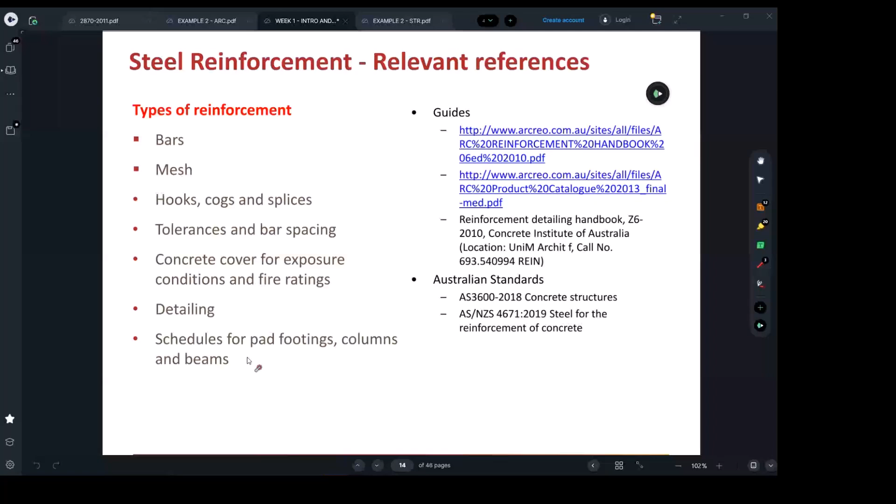I don't know what you mean bending scheduler, it's just a bar scheduler. Their job is to calculate and count how many bars are required for your project. Okay, and he's just gonna be working for you basically. But to have a quality process, you have to get it done right. Make sure you don't over supply or under supply, because if you under supply, it's gonna cost you time. If you oversupply, you already cost your project.

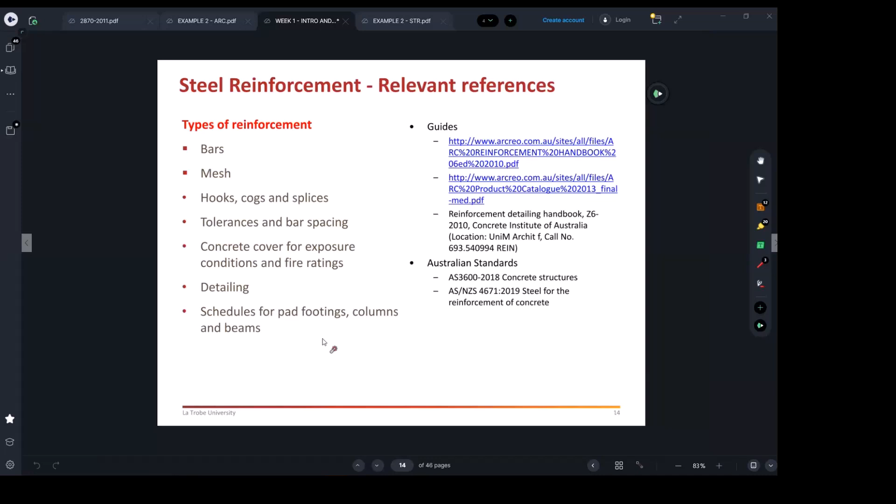Why did you waste? So you would rather make sure there is a steel scheduler to calculate how many bars are required, how many of them need to be cogged. Everything should be done in order, and people do this very well typically to make sure nothing goes to waste.

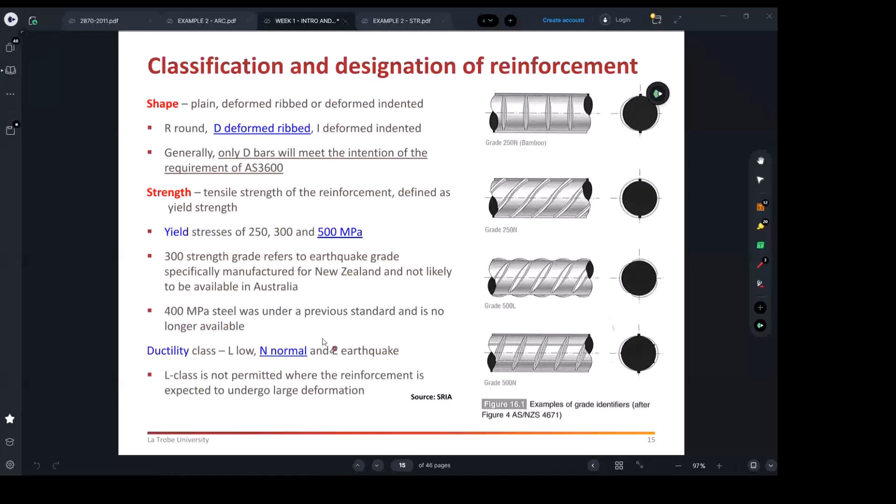Now, talking about the properties for the bars. The bars have different shapes, different strength. As a practicing construction engineer, you need to make sure it is done as per the drawings. Everything is given to you. As a construction engineer, you're not supposed to be designing or guessing or assuming.

Now in the market, there are different shapes, different strength. Ideally, the strength for bars is this one I'm showing you, blue, 500 MPa. In terms of shape, they can be rounded or deformed. Typically, what we use is the deformed. It's got those features to make sure the bond exists.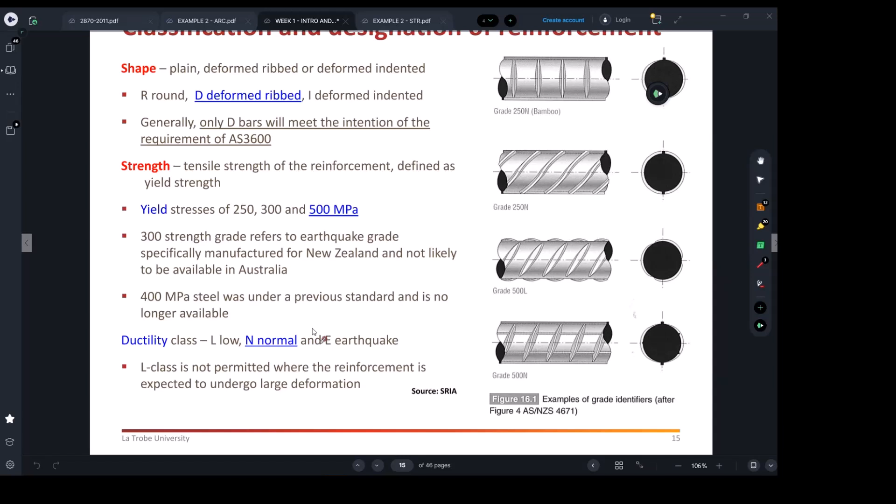What else would I be talking to you about? Ductility. In the market, there is for earthquakes, which for high-rise buildings, there is low ductility and there is normal. Typically we use normal. So the bars are referenced with its ductility and its diameter, which we're gonna be seeing over the examples. Now, as we said, they've got size.

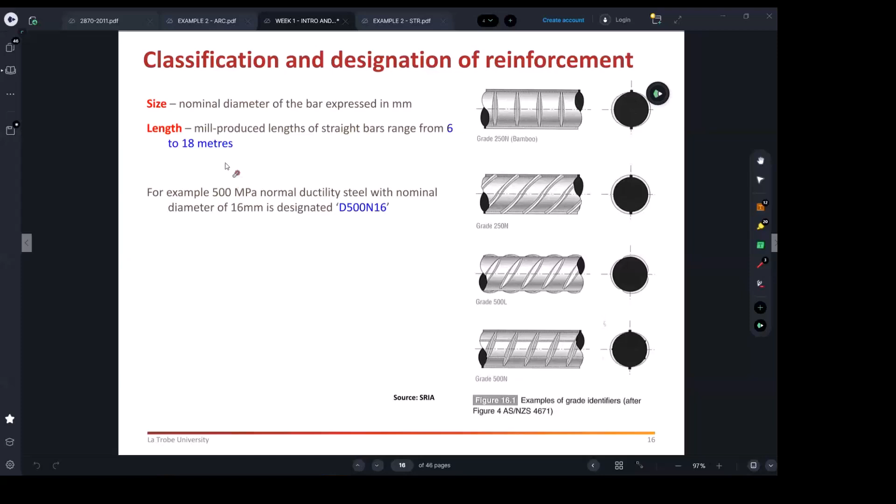See here, this is how, ideally, typically we actually call the bars N16s. That's all we say, because typically somewhere it's written they're all deformed and they're all 500 MPa. We don't change this much. We don't change the deform type and the grade of steel. We just change the size, because usually for slabs it's different than the band beams, different than the columns. So we keep changing the size.

So this is the last two numbers, they are the diameter. It's a 16 diameter bar, normal ductility, deformed, and 500 MPa strength. As I said, the length can be limited, going up to, they're telling you from 6 to 18, some of them to 12. And that's what limits your lapping. So the scheduler will figure out where he can stop and how many laps you're going to need.

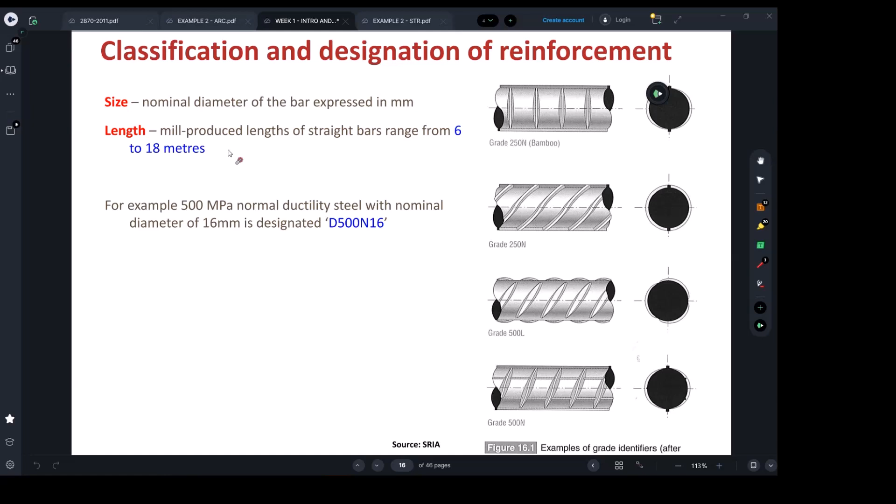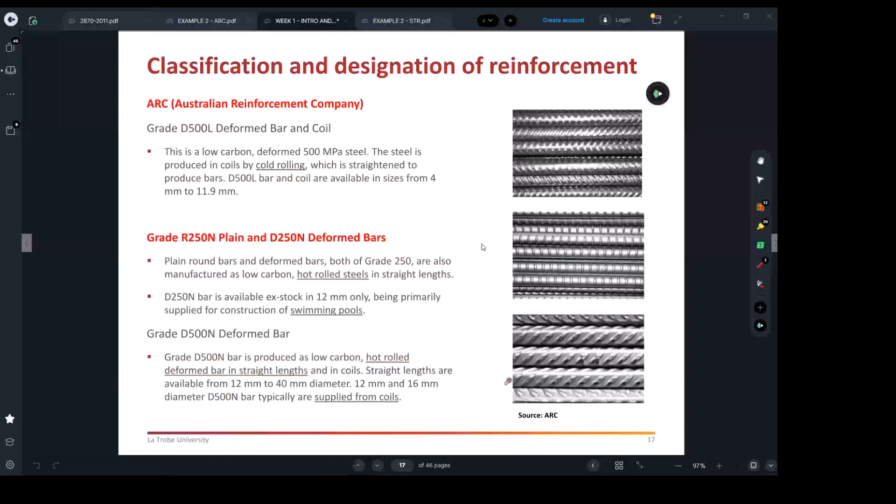What else? I just want to, yeah, these are just kind of information which will let you know about the different types of steel available, the parts that we're going to be exposed to over the weeks. I'm trying to stop and talk to you about this. So there is a different bar for different uses, which will give you different strengths and features.

All right, that was about the properties, loads, and construction considerations. So the structural engineer, when he designs, he's gonna look after safeguarding, stability, and safety and all that. And that's again your role. When you build something, you need to make sure it's gonna be stable, static. You're gonna achieve all the safety requirements intended by the project, and you're gonna achieve the serviceability requirements, the aesthetic, the economic side.

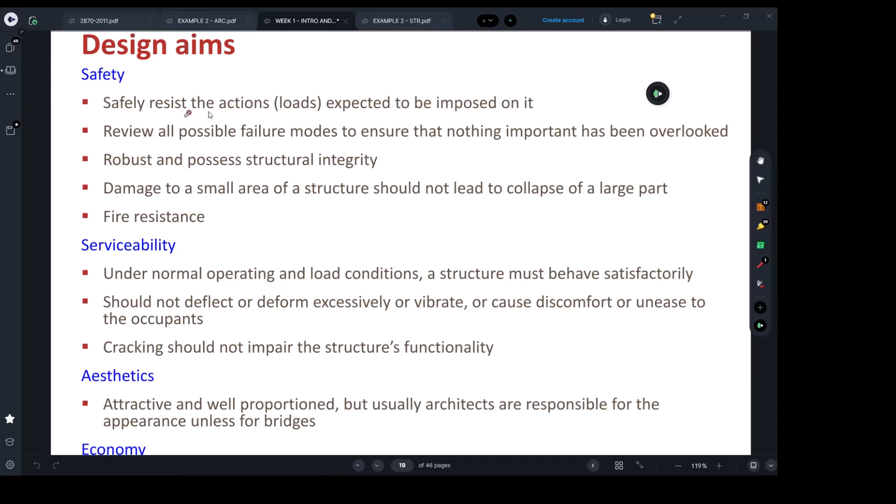Remember, builders, if you know or not from the industry, hold the highest responsibility in producing, because they get the highest piece of cake in this whole project. The construction bill is the highest among all other consultancies. So they are paid the most of the construction fees.

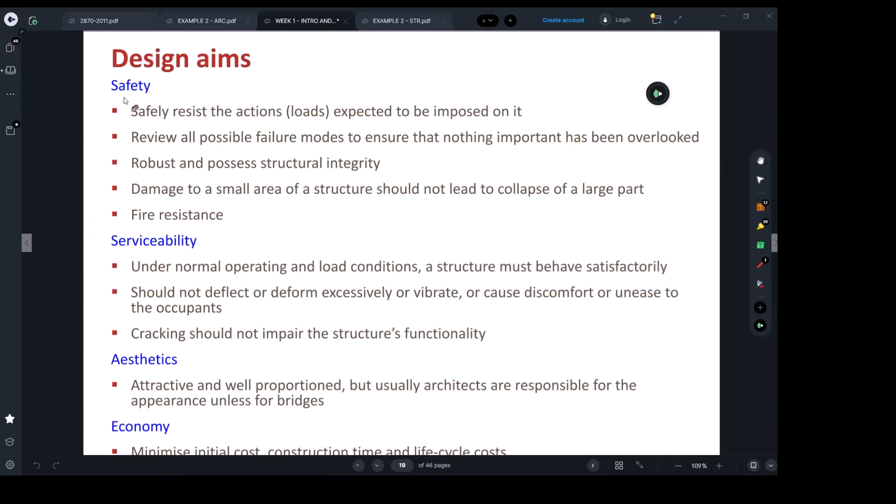So what I'm trying to say is, structural engineers maybe look after safety and serviceability, but they don't care about the look of it. So the builder needs to make sure he's going to be clearly communicating things between the architect and the engineer, because the engineer will be worried about having something safe, stable, that does not deform a lot, and that meets his intended aims. But maybe some of his design does not match the architectural intent. Then you have to be the one to communicate between those two different consultants to get to the right decision.

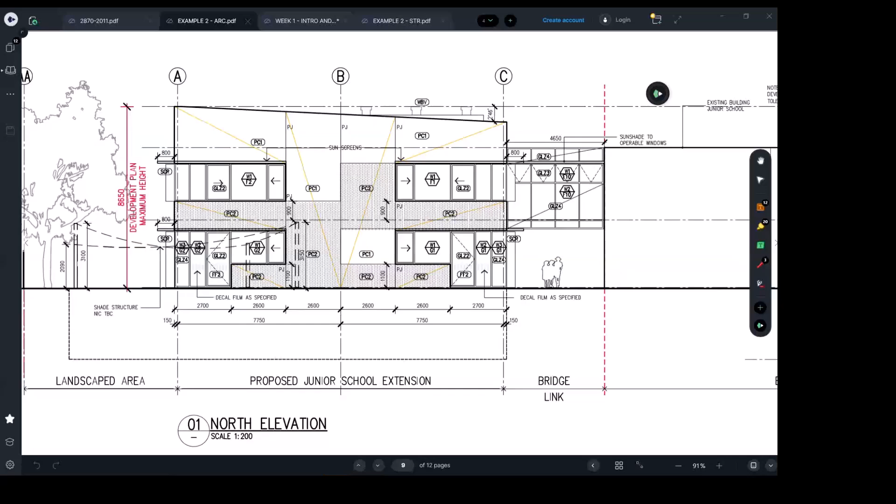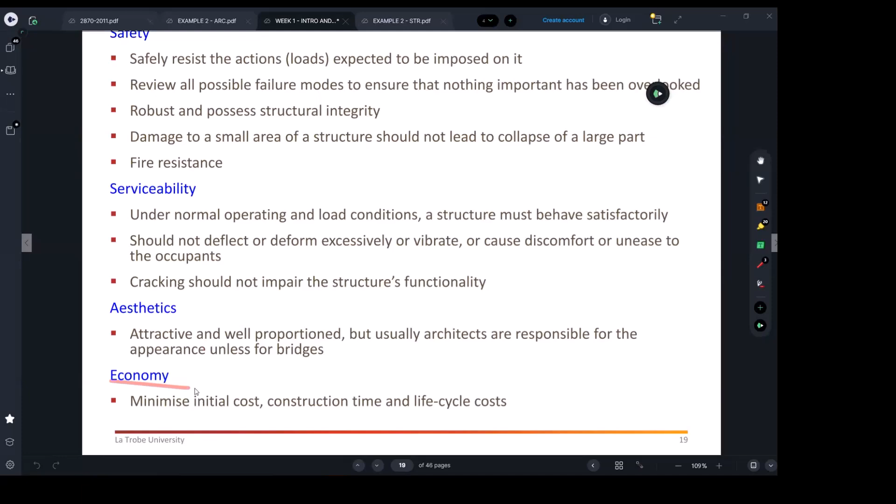So let's go back to our lecture notes. I've given you a strong example about aesthetic and economical loads. If people have done engineering, they're going to say it is the engineering job, full stop. Agree with you. The only thing you need to make sure of when you're putting loads on your slab during construction, is that they don't go above what the engineer assumed.

Because sometimes if you're building a hospital, for example, you want to build some precast panels, and imagine you're standing on a slab already built, like a basement car park slab, and on top of it you want to build a wall. So your crane has to move on top of a slab you built a few months or weeks ago. You have to be careful to make sure that crane can actually physically stand on that slab or not.

That's why loading is something you need to know about. As an engineering design, loads can be vertical loads like live load and dead load, and horizontal loads like earthquakes and wind loads, etc.

Alright, look, I will stop shortly. These are very generic information. We may continue them because during the workshop I typically use part of our first workshop to talk about these general skills and information. So we should be able to stop soon.

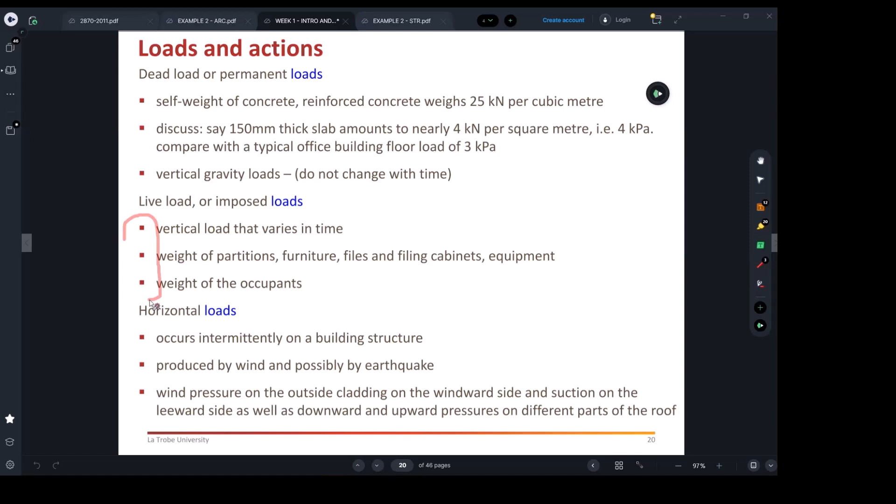Continuing to talk about loads, one of the things you need to understand is that some loads are action loads, like what we talked about. So dead loads, they are active. Live loads, you know them, they come from occupants, vehicles, if we're doing a car park. Horizontal loads, we talked about it. Some of them are non-load actions, but they can impose issues on your structure, like corrosion, severe local cracking, like differential settlements of footings.

This can happen a lot locally if you've got trees around you. Trees, especially mature ones, can suck the moisture from the soil, especially in dry season, and that causes the soil to get dry, causing some minor movements. But this usually happens only in light structures. It won't happen in heavy structures, because they're difficult to cause that kind of settlement and movement, and it can be easily controlled by the system above it.

Change in temperature and humidity can all have an impact on our structures. For you guys, this is typically controlled by the structural engineers, but during construction you still need to be aware of it.

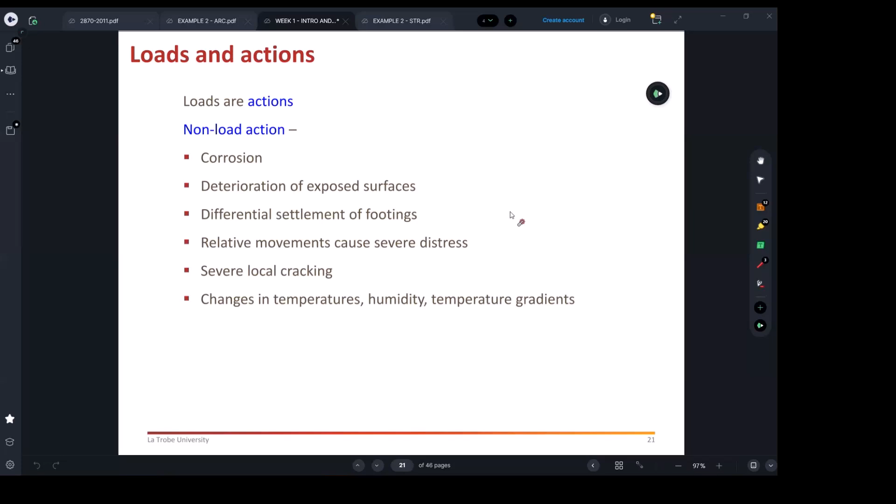But these things can typically be looked after with different techniques, and I think the industry knows how to deal with it.

Okay, so let's stop here. Let's stop at load paths. We have maybe a decent number of slides to go through - I'll just be scanning through them. Some of them are just to prepare you for the coming applications, but you don't need to heavily memorize the skills we're talking about. I just want to remind you about the different framing techniques available in different types of buildings.

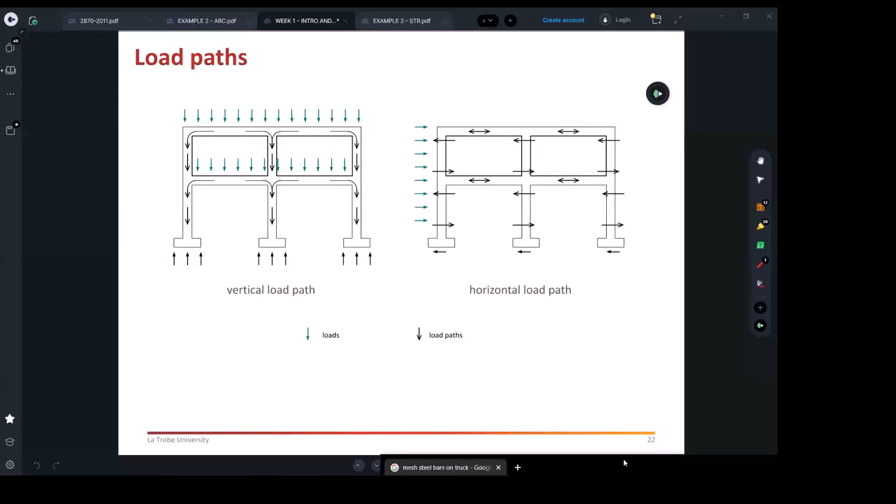By the truck, how do they transport the mesh of steel bars? Let me show you how the mesh of steel bars look like, transported by truck. I think this is the best picture that will answer your question. Does that make sense? So these are the meshes I was talking about.

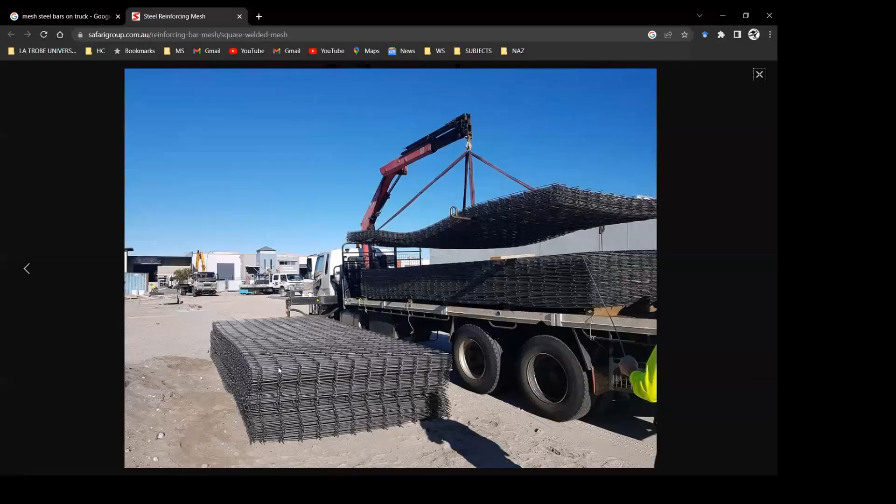They come in 3 by 3 or 2 by 2 or whatever, and they're tack welded together - tack weld, and they just put them on the spot. Was that your question? All right, so that's how they do it.

Definitely they won't make it wider than possible because VicRoads will give them a big fine. Remember, these kinds of meshes we can't do for heavy bars like N16s - we typically do them for N12s and smaller, just for your information. N16s maybe, but N20, N24, like 24 diameter, are too heavy - they can't do it, they only do it for light steel bars. Okay guys, it was good to meet you all.

Now, they won't bend it - that would cause, as you said, residual stresses. They won't pre-bend it.